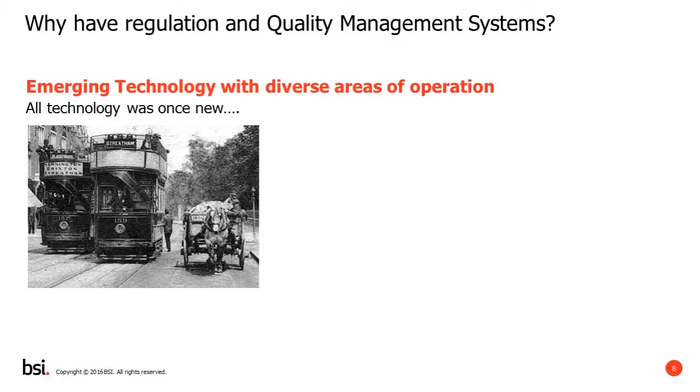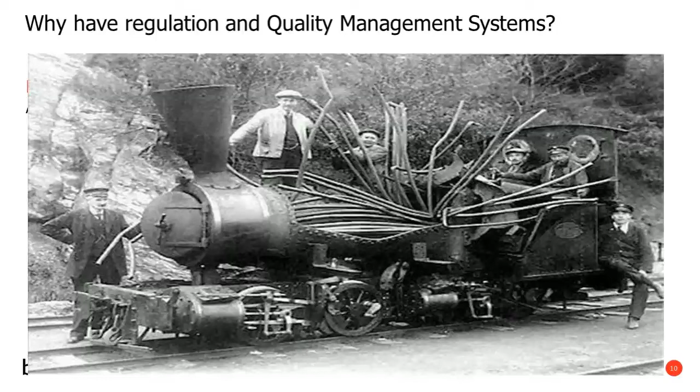And the consequence of diversity was that sometimes things went awry. Now, that's a train. If that happens on the ground, there may be some collateral damage to the side, but it's nothing like the potential that arises from an aircraft incident. And sadly, we've all been reminded of that over the last 6 months with the two 737 MAX issues. So the importance of standards in every aspect of aircraft design, certification, maintenance, repair and overhaul is readily evident.

So why have a QMS? In a simple word, quality, right first time and on time. The 9100 standards are all written around two things: 100% on-time delivery and 100% conformity. So whether that's manufacturing or whether it's maintenance, repair and overhaul, those are the two things that every stakeholder wants.

But we're also looking at safety, safe service delivery and safe operations. And again, those recent incidents highlight the importance of MROs. And I think it's often overlooked what we're trying to do in MROs. Flight safety, that's what we're trying to do.

Each is a business, each organization needs to be financially viable, it needs to be able to meet its stakeholder needs, it needs to meet the needs of its investors, it needs to meet turnaround times, it needs to get aircraft out on the line on time. But we mustn't overlook flight safety, and that's really critical.

And standards can really help in every aspect of the maintenance, repair and overhaul management. You need to meet those customer expectations, you need to be cost effective and assure all stakeholders. So there's nothing new there. And some might argue that that's what Part 145 or the FAA repair station regulation does. But I'm going to talk a little later more about the deltas, the differences between regulation and an assured business.

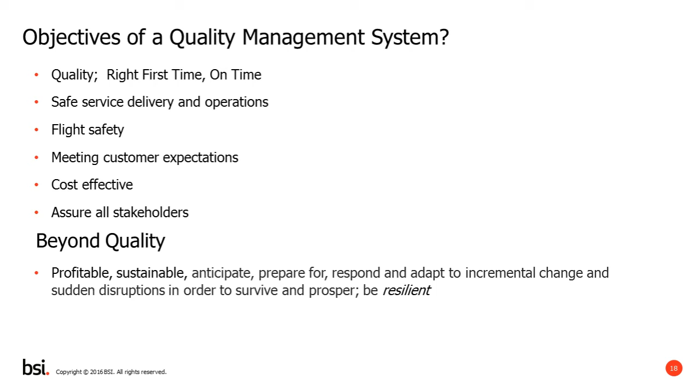Going beyond quality, we need to look at resilience. An organization needs to be profitable, sustainable. It needs to be able to anticipate, prepare for, respond and adapt to both incremental change and sudden disruptions in order to survive and prosper. And we can all think of organizations which have failed to do that. You don't want to be one of those. So we're going to talk about resilience towards the end of this presentation as well.

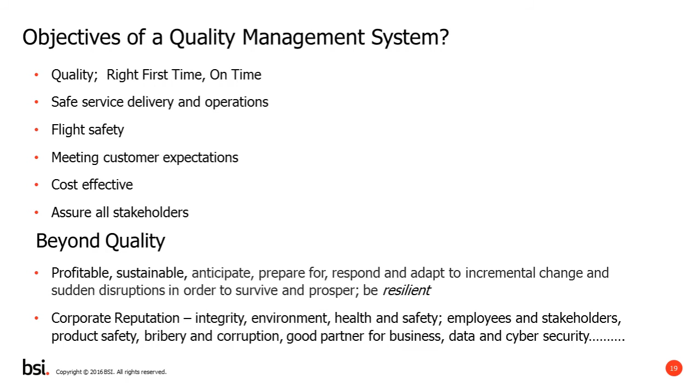Corporate reputation. Again, going back to the most recent and sad incidents, corporate reputations are easily damaged. You need to protect every element of that reputation. And there are various standards that are pertinent. Environment, health and safety. Think about your employees and stakeholders, product safety, bribery and corruption, being a good partner for business, data and cyber security, and all the contractual agreements you have. Somewhere in there will be something about protecting the intellectual property of your clients. So you've got to think in the round when looking at going beyond quality, and that's what resilience is about.

So let's think about standards then. The 9110 standard, which is the maintenance and overhaul standard, says that the potential benefits of an organization implementing a quality management system are the ability to consistently provide products and services that meet customer and applicable regulatory requirements. So it helps in meeting regulatory requirements consistently. It facilitates opportunities to enhance customer satisfaction. Everyone out there is meeting the customer needs, whether it's an aircraft operator or an aircraft repair organization. They each have very specific needs.

You've got to address risks and opportunities, and it's interesting that the Part 145 regulation mentions the word risk once, whereas the 9110 standard uses the word risk 79 times. So that is quite a significant difference in the approach between a regulatory organization and a 9110 certified organization. So it is rather more than just complying with regulations. It changes the mindset, it changes the culture, it changes the approach to meeting the needs of all those stakeholders.

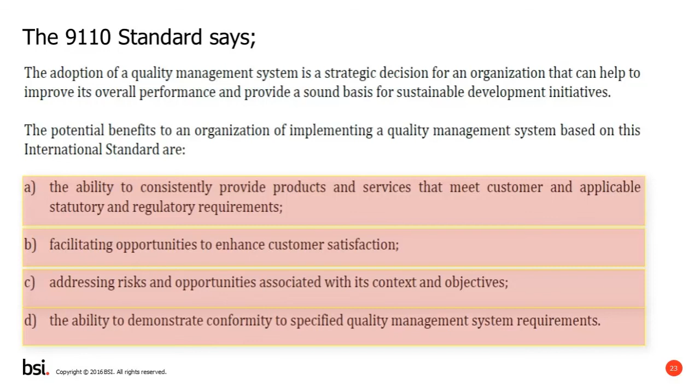This is an extract from Part 145, which is the European regulatory standard and equates to an FAA repair station. The organisation shall establish procedures agreed by the competent authority. So you've got to have documented standards. Those procedures have got to cover all aspects of the maintenance activity and minimise the risk of multiple errors. And that's the one mention of risk in the regulatory standard. Quite interesting, one mention of risk. So you've got to meet all those things.

So the risks, we're talking about multiple errors. It's the incident pit, the cone of disaster, or call it what you will. Any incident you care to look at pretty much has a whole series of things which go wrong and lead to an accident or an incident. There's no one thing that can be said to be solely responsible for that cause. So there's always a series of things that led to that problem.

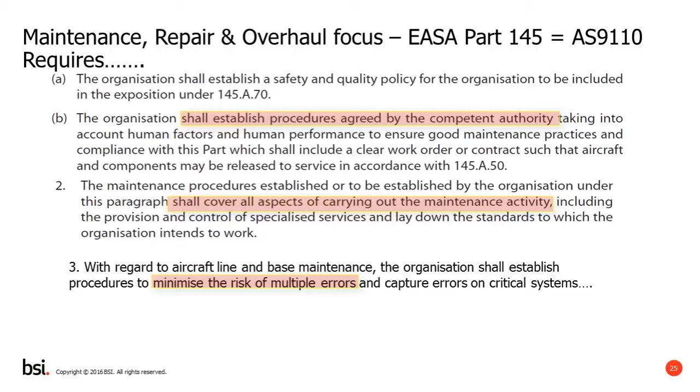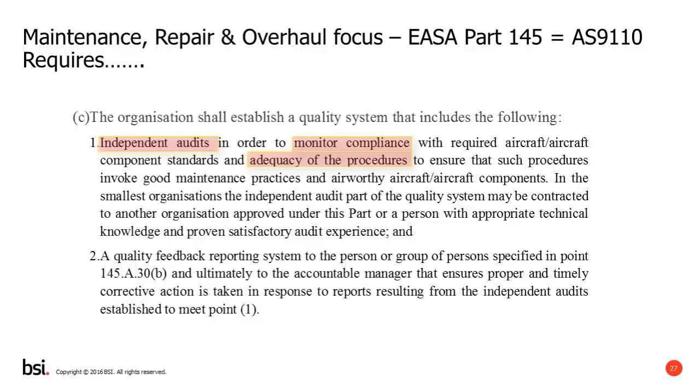If we look at this, the 145s, you have to have independent audits to monitor compliance and ensure the adequacy of procedures. That's an internal first-party audit of your system. How effective is that?

We look at the FAA repair station regulation. It's very similar - that too says you must establish and maintain a quality control system. An interesting choice of words there, talking about quality control, not quality assurance. And that alone is a philosophical difference between a regulation and a QMS, a quality management system, which is focusing on assurance. So the approach, the culture and the mindset behind it are different.

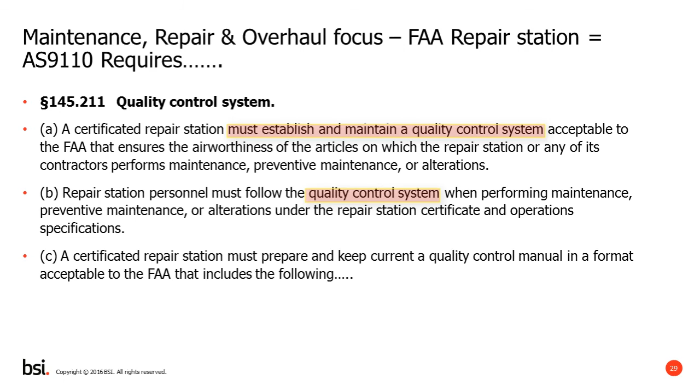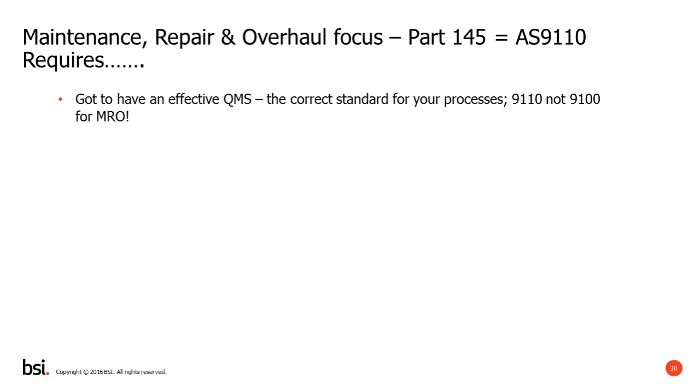So in summary, those say you've got to have an effective QMS. The correct standard for maintenance, repair and overhaul is 9110, not 9100. But you need to have confidence in your system. You need to make sure that you're getting the best from it. You need to focus on the specific requirements. And as a senior manager or accountable manager, you certainly need to know that it really works for you, protects your organization, and really works for your customers.

And protecting your regulatory approval is rather critical. This is a photograph I took at an EASA presentation in Washington in 2018. I apologize for the two heads - these were two people in the audience. But the point is that on this presentation, EASA made two particular points.

Common findings: quality system not in place and not effective. So they're saying that organizations that are regulated either have an ineffective QMS or no QMS in place. And the result of that in 2015 and 2016 is that 20% of all the organizations they visited lost their EASA approval. That's a terrible statistic - one fifth of the organizations they visited were deemed not worthy of that regulatory approval.

And then in 2017, it was the same. So that's a consistent statistic that for 3 years, organizations being visited by the regulator were unable to demonstrate they could meet the regulatory requirements for an effective quality management system. So having a 9110 certificate, if nothing else, is going to help you protect your regulatory approval.

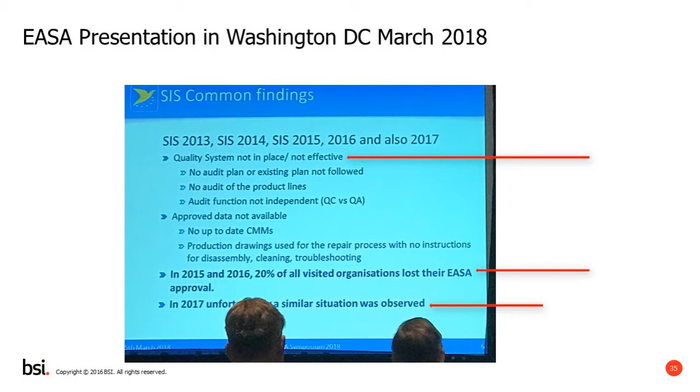Make sure you're not going to be one of those 20% by having a third-party independent body come in and go through your standard, go through your QMS, go through your exposition, go through your procedures, and then verify the effective implementation of everything you've written. That's going to protect your regulatory approval, which in turn means that it's protecting your stakeholders.

Now, if we look at aerospace incidents, these graphs show that even though the number of yearly flights in millions is going up significantly, the overall number of hull loss, accidents and fatalities is going down. So it's a good trend. However, there are peaks and troughs - it's not a consistent trend downwards. So we want to avoid those peaks and troughs.

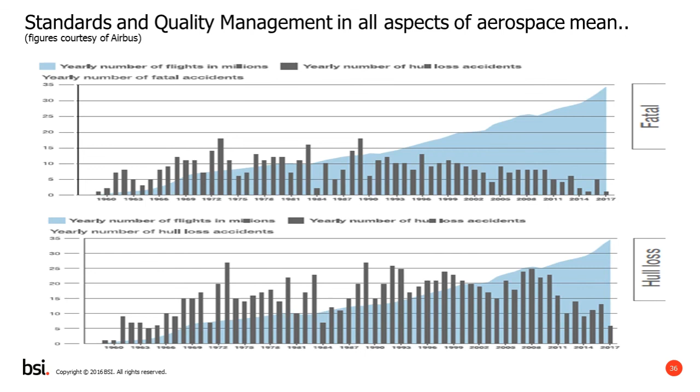Zero defects is where we need to be, right first time, every time. And of course, that's what a quality management system focuses on. It drives towards continuous improvement, because things can and do go wrong. And it's when a series of things go wrong that you find a problem. No one thing is going to cause an accident - it's a series of things which line up and lead to an incident.

So in 2017, we had a record year - no passenger jet crashes and only 12 fatalities in total, depending on how you look at the data. So that's a really good thing, that was a positive year. And of course, ideally, we'd maintain that.

Interestingly, relatively few MROs hold 9110 certification. So while manufacturing has very good penetration of 9100 certification, in MROs the penetration of 9110 certification is relatively small. So it does make you wonder, is there a correlation between accidents and incidents?

When I speak to MROs and I ask whether they have 9110 certification, they very often answer that they have 145, therefore don't need 9110. So if an organization has Part 21G, Part 21J and so on, but also has 9100, why is there a different mindset between the manufacturing organizations and the MROs?

Now, talking about these recent incidents, and sad though they are, we can start drawing information from them already. The Lion Air crash in October last year is still being investigated, but these bullet points here are quotes from the investigation. That's the sequence of issues. The crew said they couldn't determine the altitude of the aircraft because all the instruments were indicating different altitudes.

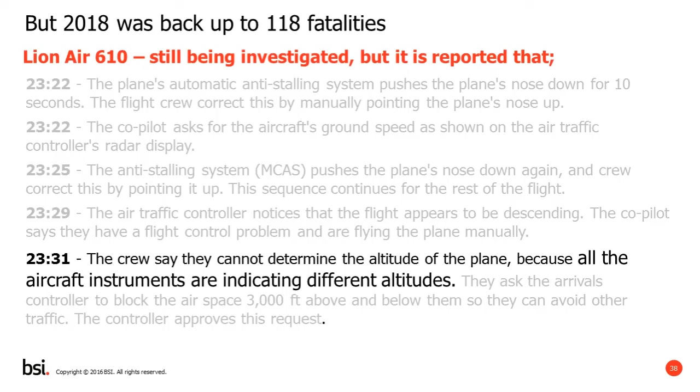And this is what we have really, the series of effects. This is what a QMS is aimed at doing, preventing things. It's an assurance, it looks at all the hazards. Remember the difference between the regulation mentioning risk once and the QMS standard mentioning risk 79 times.

So you've got latent conditions, which a QMS should identify when you're doing your risk-based thinking, when you're setting out all your procedures, writing your manuals, writing your documentation. And then you've got the other holes due to active failures. These could be behaviors, lack of mindfulness, lack of awareness, lack of competence. When all those things line up, that's when you can end up with an accident or an incident.

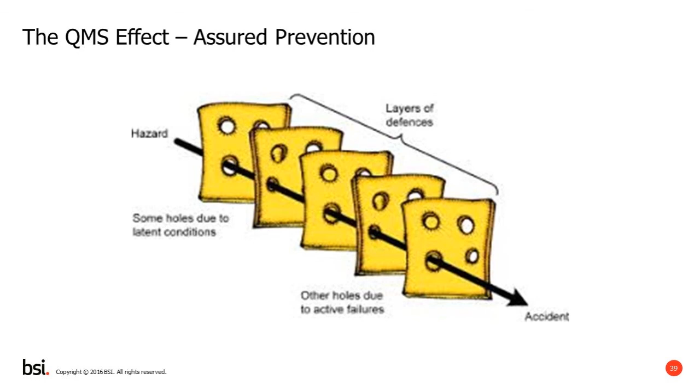So when things are going well, that's what we have in mind. Whenever we go flying, and I'm going flying tomorrow, that's what I have in mind: a nice, safe aircraft where everything's working, the crew are competent, the engineers that worked on it are competent, and as long as the in-flight entertainment's okay, happy days.

But then we look at these when things go wrong. Every one of these incidents was due to a series of events. Somebody made decisions, made the wrong decisions, and released an aircraft to flight. In the case of Concorde, for example, it wasn't Concorde itself which had a problem, but it was the maintenance of the aircraft that took off before it. The panel was left loose, and that came off on the airfield.

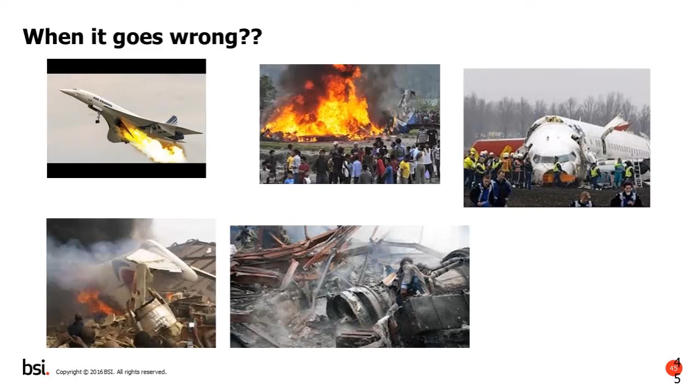That was one of the things that went wrong. Normally before Concorde took off, there was a check of the runway to make sure there was no FOD, no loose articles. For some reason before that aircraft took off, they decided not to do that. So that's at least two things in the cone of failure, the incident pit, that led to that aircraft crashing and 113 souls perished. So it's never any one thing that leads to these incidents.

So let's look at standards briefly. The IAQG, those of you listening I'm sure are familiar with the IAQG, but we have the three sectors: the Asia Pacific sector, the European sector, and the Americas sector. And they have the three standards, 9100, 9110, and 9120. We're, of course, focusing on the 9110 because that's the pertinent one for MROs.

So why do we have third-party certification? Well, it's essential for some. It gives you independent, rigorous assurance. Remember, it's assurance, not control, so it's focusing on a different approach. It assures your clients and stakeholders, brings in the flight safety, and brings in the reputation, and assures your regulator. You don't want to be one of the 20% that EASA withdraws regulatory approval from every year.

Globally recognized, promoted by the primes. They wrote the standard, so the standards that we would be auditing you to are written by industry. It's not like ISO 9001, which was written by a committee of general industry personnel. This is written specifically by the aerospace industry, so it's written to meet the precise requirements of you as an MRO.

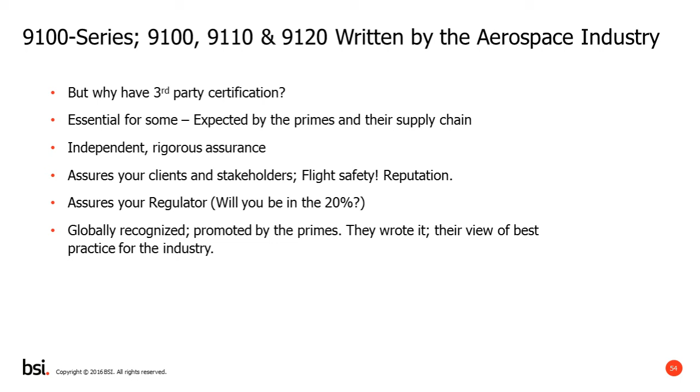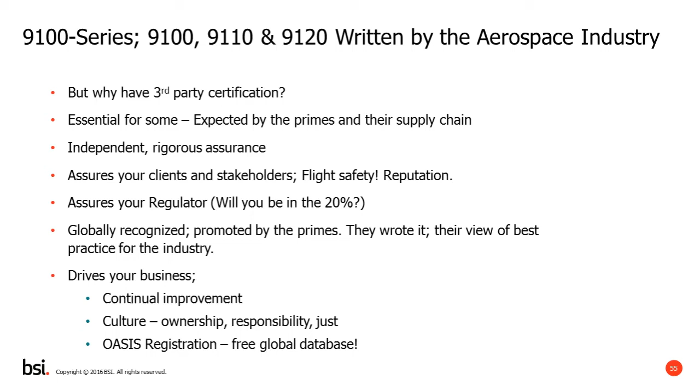And it drives your business: continual improvement, culture, ownership, responsibility, a just culture, and the benefit of OASIS registration. So you're registered on a database, which means potentially it's a business winning option as well.

9110 is written for MRO, addressing the particular requirements, risks and issues. 9100 is general and not specific. It's worth noting that in some areas 9100 is seen as being hierarchically superior to 9110. People seem to think 9100 is the highest standard and 9110 is a lesser standard, and 9120 lesser still. That's not the case. They are all of equal merit. You just pick the standard which is pertinent.

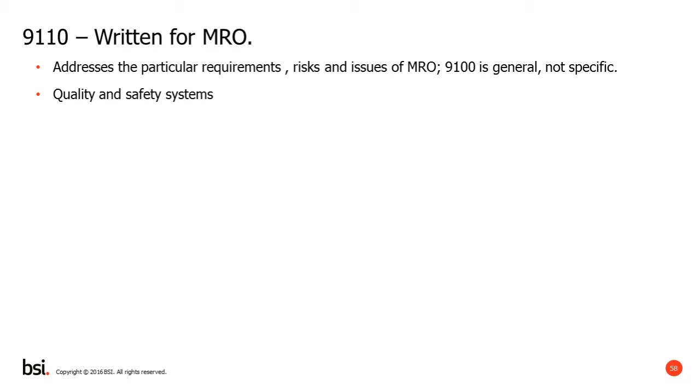If you have 9100, that's focusing on design, development, manufacture, and won't necessarily cover the specifics, the deltas in 9110. So you really should have the standard which is pertinent for you, to focus on the quality and safety systems, the MRO processes, the things relevant to MRO, the people relevant to MRO, the accountable manager, the certifying staff.

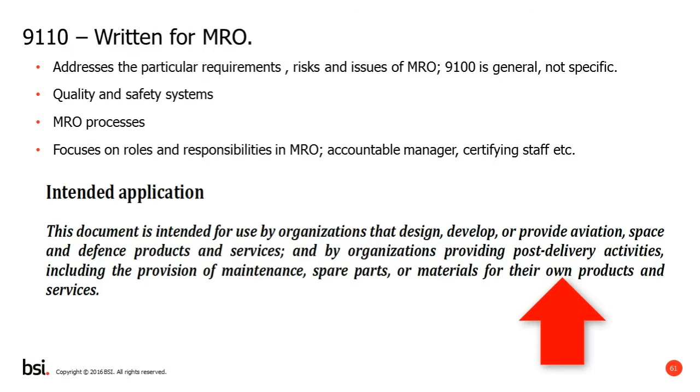It's also worth noting this part in the intended application, written into the 9100 standard: the standard is intended for organizations that design, develop, or provide aviation, space, and defense products and services, and by organizations providing post-delivery activities, including maintenance of their own products. So 9100 is designed to apply to people doing MRO of their own products, not MRO of other people's products.

The 9110 specifics include things like facilities, human factors training, accountable manager, certifying staff, tools and equipment provision, maintenance manuals, and of course you may do design and development of maintenance regimes, so 8.3 may apply to that. Components and spares, control of counterfeits, provenance and documentation, fabrication of new parts, unserviceable parts and materials management, segregation and mutilation. These are just a sample of things specifically written into 9110, but which you won't find in 9100.

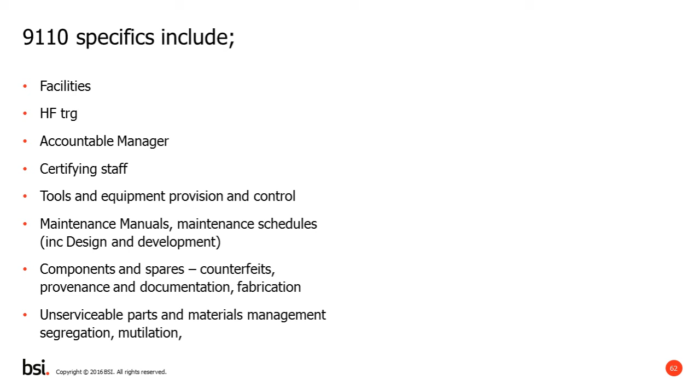So an MRO can assure this and prevent that. It brings all these three things together: the regulations, the standards, and the compliance. Now, to highlight the difference between a regulatory approach and a quality assurance approach.

I'm going to tell you a little war story which dates from 1987 in Soest in Germany, when I was serving in the army, and there was a Lynx helicopter, XZ204, which crashed. In those days the military worked purely to regulation, military regulations which were equivalent to the civilian airworthiness regulations at the time, so the equivalent of Part 145 and so on. When I first arrived in Germany in 1979, so I'm going back quite a while, 40 years...

We had the Westland Scout helicopter, and within 3 months of me arriving in Germany, we got rid of the Scouts and got the Lynx aircraft. I'd never been trained on Lynx, and I worked on Lynx for 2 years before I had the joy of doing the course for that aircraft. That would never happen in a quality assured organisation, but under the regulations it was allowed to happen.

So what were the risks linked to that? Well, step forward to 1987 in Soest: there was a Lynx which had been in the hangar undergoing maintenance. The aircraft went out on a test flight. There were 2 crew in the front, the pilot and co-pilot, and in the back 3 passengers, because they thought they'd use the test flight to take these 3 chaps to Gütersloh so they could fly home on leave. The aircraft was in the air for a total of 6 minutes.

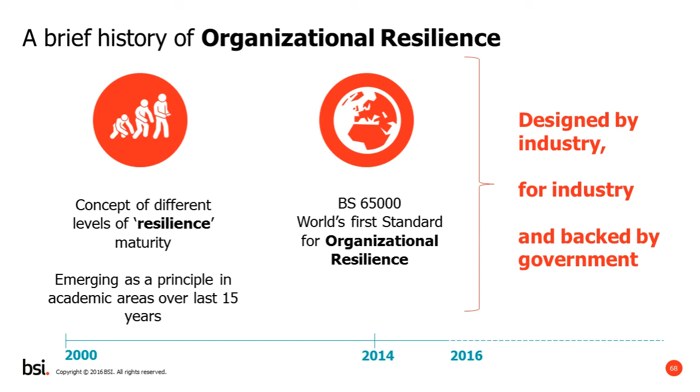It works on three key domains: operational resilience, information resilience, and supply chain resilience. You can readily map that to what we do in MRO. Operational resilience is governing your business, running the business, looking at your customer needs, managing and securing everything you do in that production side of the MRO.

In supply chain, you need to look at things pertinent to aerospace, counterfeits, unapproved parts. A part could be unapproved even though it is a genuine part, but it may have the wrong documentation—if it hasn't got an 8130 or an EASA Form 1, even though it's a genuine part made by the original manufacturer. If it hasn't got the right supporting documentation from the right regulatory approval, it's still an unapproved part. So you're looking at your supply chain resilience.

And then information resilience brings in data security, information security, ISO 27001, for example. But there's a whole range of things that are pertinent. Using this structure, you can identify where you are now, where you need to be, where you're strong, where you're weak, and which actions you need to take to make sure you've identified all those risks. So it's about risk-based thinking, which of course the 9100 series requires, and giving you a structure around which to apply it.

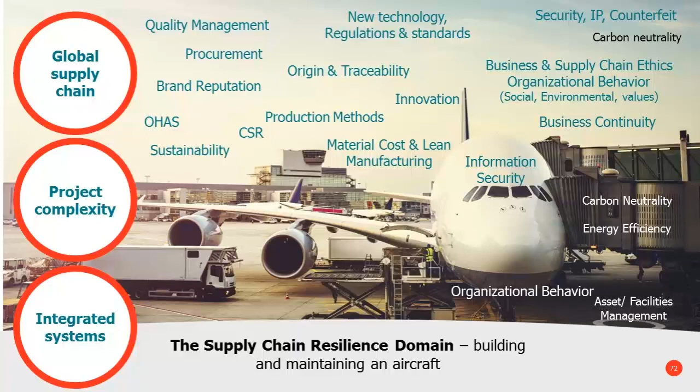If we look at information resilience as an example, things you would think about would be cybersecurity, security awareness. Phishing is the easiest way of getting into an organization. I probably get 2 or 3 phishing emails a week, but because I'm trained and aware, I send them to our IT help desk. That's the easiest way of getting into a system though, so people have to be aware.

Data management and privacy, GDPR of course has been pertinent over the last year. Then compliance and testing. And we can provide services towards the Internet of Things and the Internet of Aircraft, which is an up-and-coming way of thinking.

Any organization can log on to the BSI website and look at the organizational resilience benchmark, and you can benchmark yourself against industry. We took 1,260 companies globally, of which 93 were aerospace. By doing that exercise, you can get a good idea of where you are in terms of resilience against the global industry.

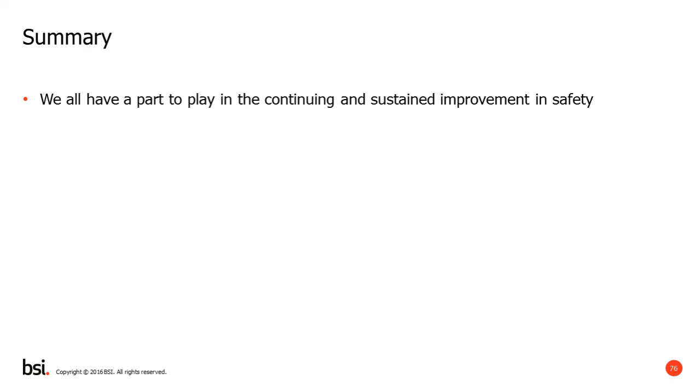So in summary, we all have a part to play in the continuing and sustained improvement in safety. MROs should be certified to 9110 rather than the 9100, because you don't get the benefits of the focus on the maintenance, repair and overhaul aspects that you would get from a 9110. Have the right standard, implement and sustain the best practice, continually improve all aspects of performance, cost effectiveness and growth.

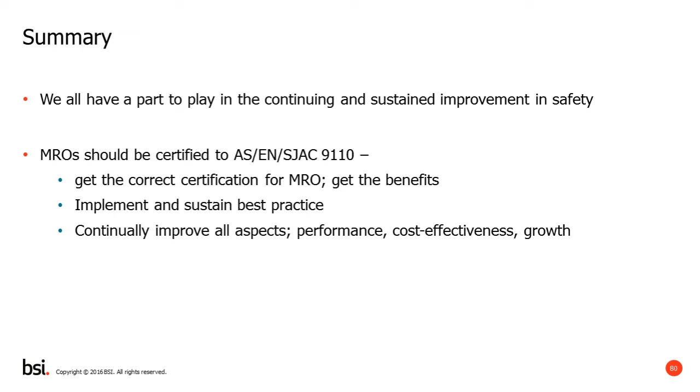And of course these things aren't looked at by the regulator—they are purely looking at compliance. A regulatory audit is virtually an old-fashioned checklist audit, which has its place, but it's very different to a process-based audit as you would get from 9110 certification.

And if you really want to go beyond quality, I would commend the Organizational Resilience Standard. Have a look at BSI's unique thought leadership and go beyond quality and be resilient.

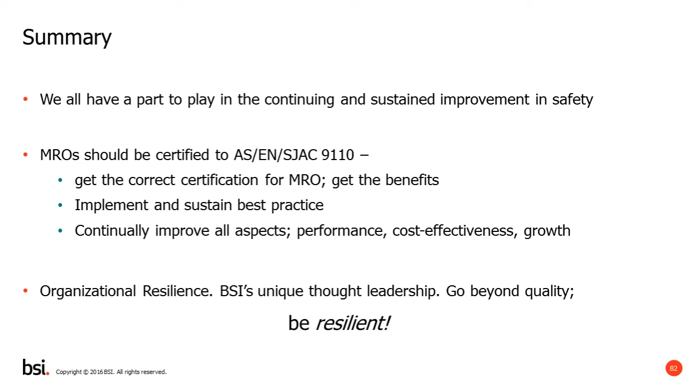I hope that was informative. I hope it helps understand the differences between regulation and quality assurance through third-party certification. And if anybody has any questions, I'd be happy to take them if you'd care to type them into the questions box.